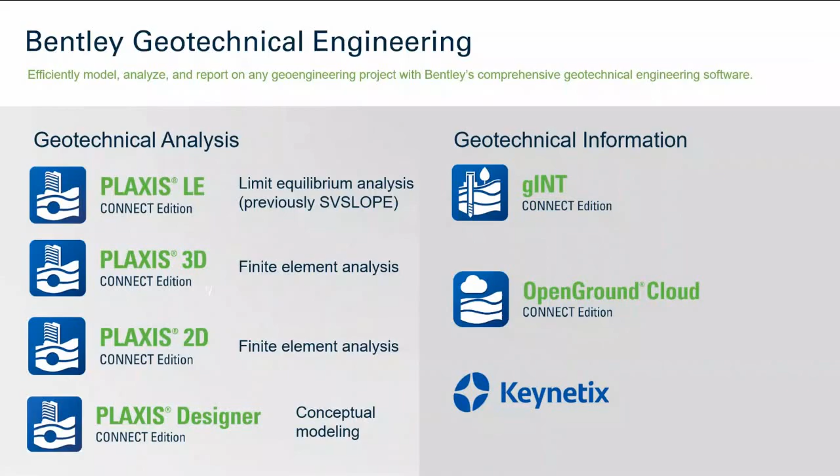So how does PLAXIS LE fit into the Bentley team in terms of geotechnical software? I founded SoilVision back in 1997. That's a long time ago. And we had a product called SVSlope. When we entered Bentley in 2018, SVSlope got renamed and rebranded to PLAXIS LE, and SVDesigner got rebranded as PLAXIS Designer. So we're really going to talk about two products today out of the suite, PLAXIS LE and PLAXIS Designer. There's a whole suite of Bentley products that you can have access to, and we're going to talk a little bit about the interoperability between the packages.

So what is PLAXIS LE? At a high level, PLAXIS LE is a 2D and 3D limit equilibrium package for performing deterministic and probabilistic analysis of the stability of soil or rock slopes. You can calculate the factor of safety and the probability of unsatisfactory performance of slopes, and the software is designed to be very easy to use, as well as have advanced features that can model complex geometries and couple with groundwater seepage. There's comprehensive support for reinforced slopes and external loadings as well.

So it should be noted that the package tries to combine some of the classic features of the method of slices analysis, as well as implementing new probabilistic analysis and advanced searching algorithms. The software was developed by a great team of people that I had to hunt all over the world for in terms of limit equilibrium expertise, and it combines a sleek and simple user interface with advanced presentation of the results. So this presentation will focus on 2D.

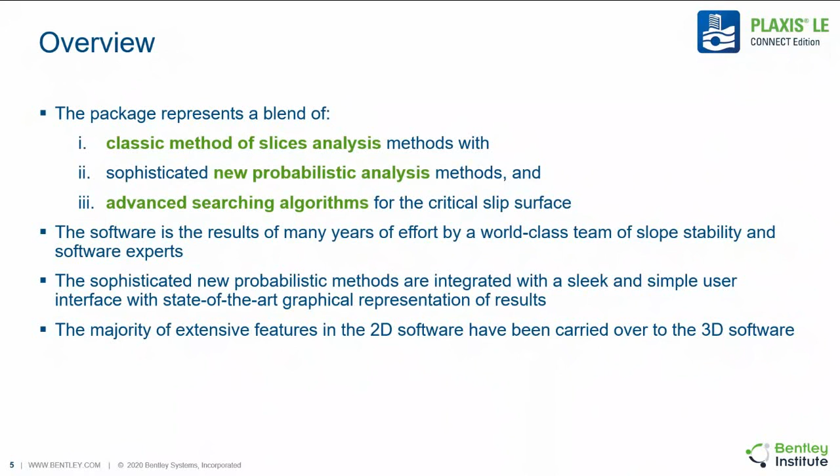However, it should be noted that the majority of the features mentioned in the software have been moved over to a full 3D analysis. So in terms of workflow, the software works from left to right through the main menu system. So in other words, if the user progresses through the menu options in a left to right fashion, you will ultimately be guided through creating and solving an analysis.

For boundary value problems, the primary focus is on three aspects of the model, which includes geometry, materials, and boundary conditions. So in a limit equilibrium, the boundary conditions could be line loads or distributed loads or seismic loads. And slope stabilization can effectively act as internal boundary conditions.

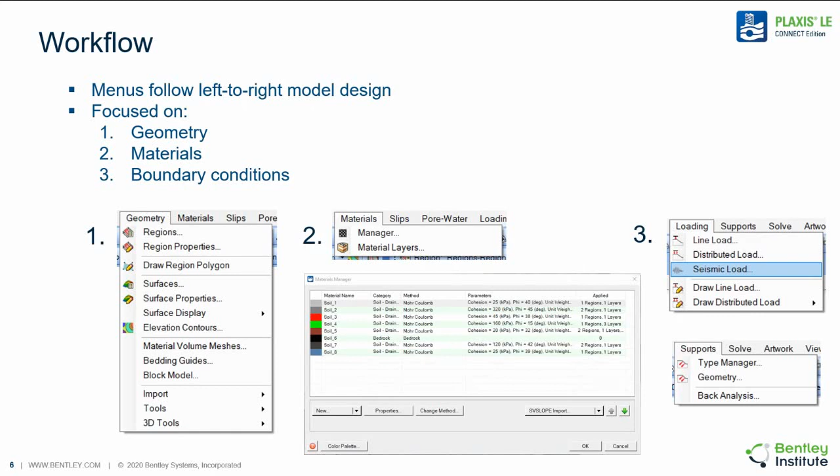So in terms of creating a new model and creating the geometry, a new model can be accomplished by importing objects or by drawing geometry polygons using CAD-like features in the software. The line angle and slope and length is displayed during the drawing process. And grid and object snapping aids allow assurance that the objects join properly.

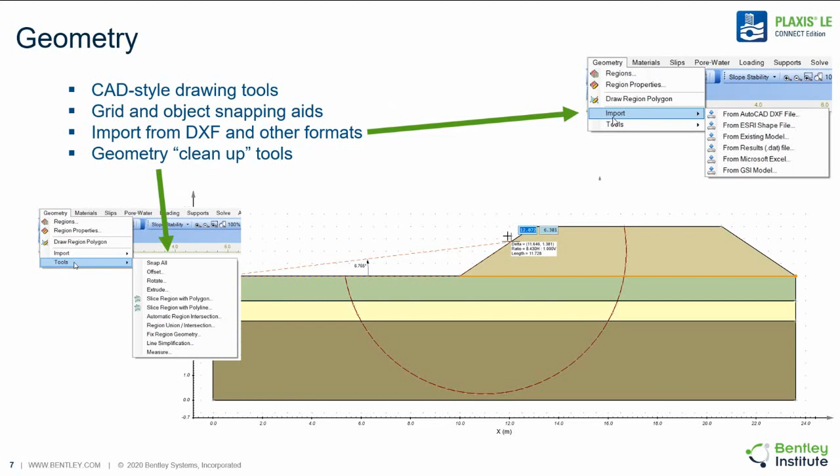So there's also a number of geometry cleanup tools. If you have drawn geometry maybe in a wrong way, or you brought it in from AutoCAD, you can correct it and fix the drawing so that everything exactly joins together and there's no gaps or no overlaps in the model.

So there's a comprehensive list of constitutive models that guide the behavior of soil or rock within the model domain. There's almost 30 different constitutive models that are implemented in the slope stability software. There's also methods for estimating unsaturated seepage properties in the groundwater modeling module. So an associated SoilVision Soils database has over 40,000 soils, allowing for a number of unsaturated soil properties to be selected based on data mining.

So soil water characteristic curves can be easily generated for a wide variety of soils for the basis of unsaturated seepage modeling in the software. And that unsaturated seepage can be used to generate pore water pressures, which can then feed into your slope stability software.

The software has a comprehensive array of searching methods for finding that critical slip surface. And the searching methods comprise both circular and non-circular methods, as well as optimization. So optimization further refines any particular circular or non-circular searching method to find the lowest factor of safety.

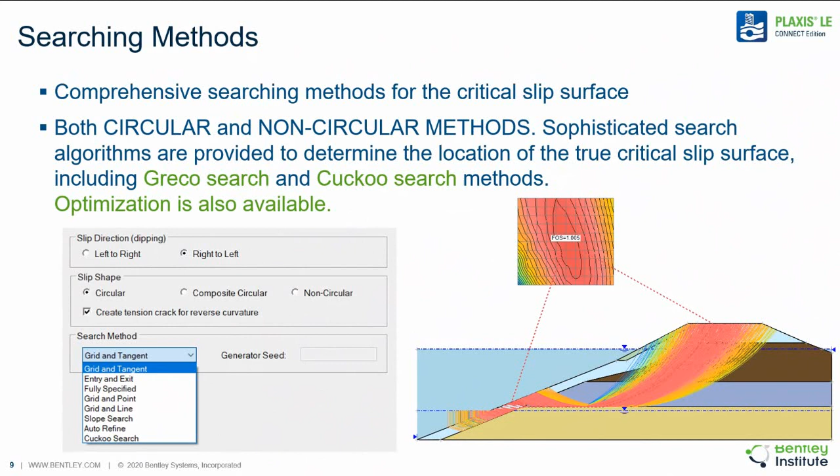So there's a number of different ways to put pore water pressures into a slope stability analysis. Water tables can be used and drawn in the software. You can likewise draw piezometric surfaces, use Ru values, or put in discrete measurement points, which are then interpolated between to have a continuous field of pore water pressures.

And this is important because we know that pore water pressures are the most common contributing factor to a slope failure. You have a change in pore water pressures that affects the stability of the slope, and then there's a subsequent slope stability issue. There's also methods of handling unsaturated suctions in slopes.

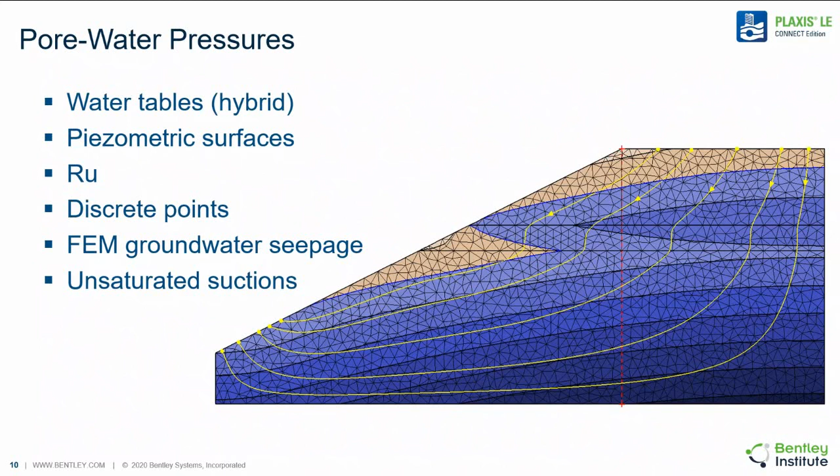So in terms of loadings, there are various types of loadings that can be accommodated in the software, including distributed loads, point loads, and seismic loads. And these loads may be drawn graphically and are easily added to the boundaries of the model.

It's common in the industry to use a pseudostatic method for seismic analysis considerations in a slope. And the pseudostatic method is very common. It has a number of advantages in that it's very simple and direct. It's simple to implement in the context of a limit equilibrium analysis.

However, there's certain drawbacks to this method in that it tends to give you an unrealistic slip shape that is very deep. It applies an equal force that's the same with any depth, which is not that physically realistic. In reality, the accelerations due to a seismic event decay as you go down in the ground.

It's been criticized as not necessarily being closely aligned with reality, but it is a simple method to use. There's also a lack of consensus in terms of what coefficients to put into this type of analysis, so there's a lack of consensus on how valuable this method is in the industry.

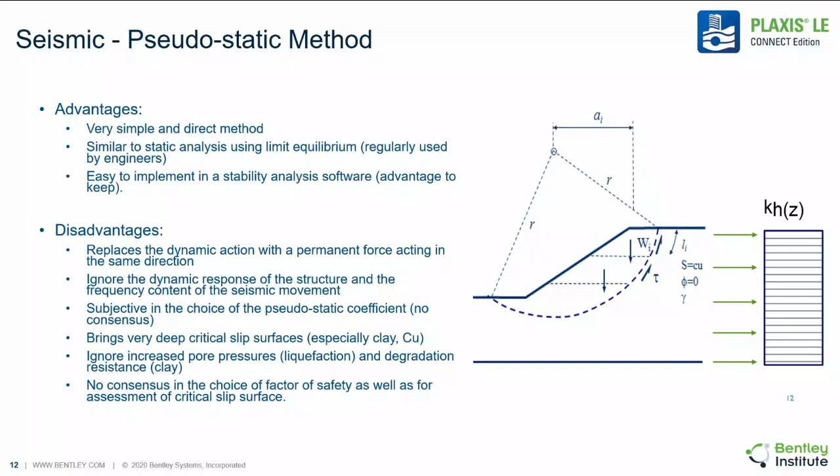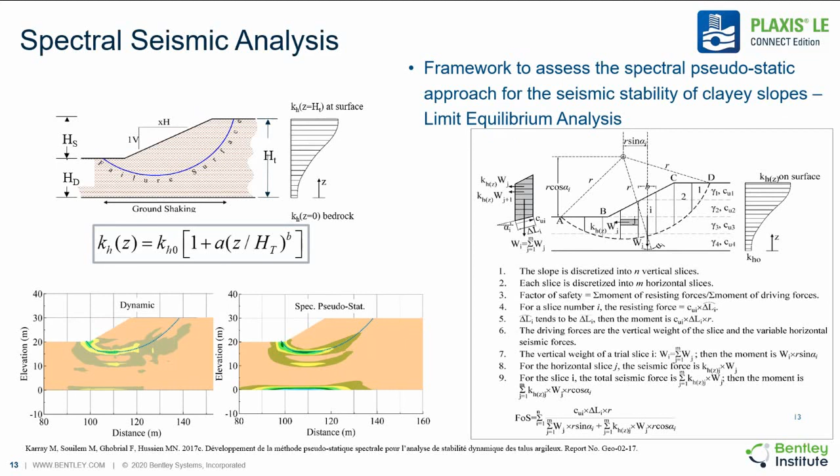As a result, PLAXIS, SoilVision, and subsequently the PLAXIS LE team collaborated with a university in Canada to implement a more comprehensive method called spectral seismic analysis. This method allows a decaying function as the key element of force application with depth, and has been shown to be much more realistic in aligning the factor of safety to a fully dynamic finite difference or finite element analysis. As can be seen in the pictures in the lower left, use of this function greatly helps the accuracy of the analysis, and we were happy to do this as a collaboration with the university in Canada.

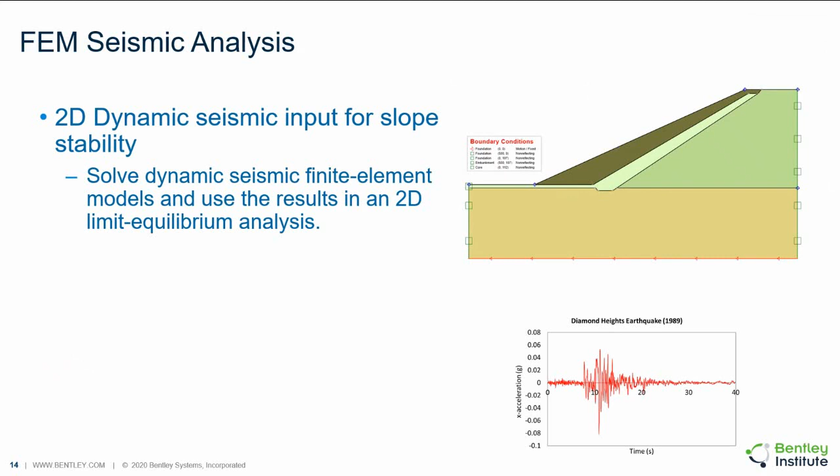There's also a finite element seismic analysis module that can be utilized for solving dynamic scenarios, and this can be used in conjunction with the limit equilibrium software.

There are also many support methods that can be implemented in the software, such as grouted tiebacks, end anchors, soil nails, micropiles, and geotextiles.

So what are some of the differentiating features? The software has been able to differentiate itself against known software competitors in the market. Let's talk about some of these features here.

The software was positioned to be a comprehensive slope stability analysis package, and therefore offers a number of advanced differentiating features, which include simplified 3D model creation using PLAXIS Designer. Even if the end result is still a 2D analysis, the package allows comprehensive spatial analysis of a 3D site.

The software also implements advanced unsaturated flow and the ability to model climate boundary conditions in detail, such that you can consider actual evaporation in your analysis. The software also allows calculation of rapid drawdown scenarios.

Advanced probabilistic analysis is built into the software, as well as advanced spatial variability calculations. There are advanced searching methods using dynamic programming, and the software's ability to model the stability of rock slopes has been greatly enhanced through the use of bedding planes and advanced anisotropic

soil strength models. The software also integrates with PLAXIS FEM and is useful for sharing models between finite element and limit equilibrium.

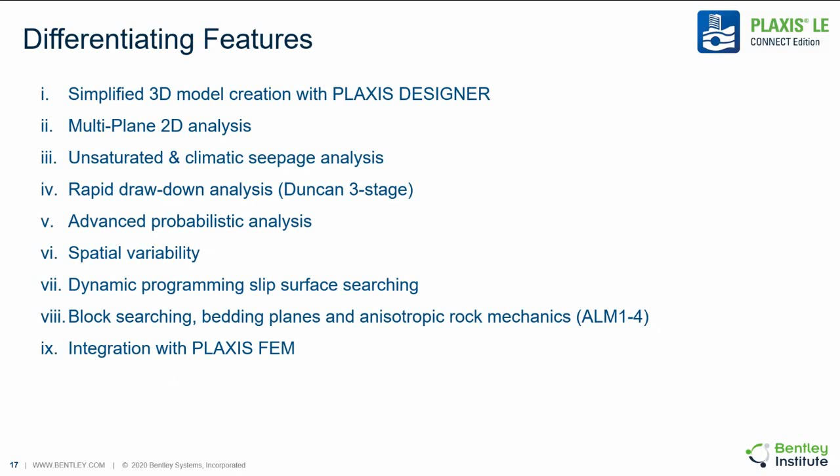Just to talk a little bit about PLAXIS Designer, it's a three-dimensional geotech conceptual modeling software that enables 3D compilation and visualization of geotech information to improve design. It allows conceptualization of many different data sources to give a comprehensive 3D site view of existing conditions or future designs. We've used it a number of times for different projects in-house as well.

It allows fast 2D spatial stability modeling, which greatly reduces modeling times. Instead of analyzing and agonizing over which slice you want to analyze in 2D, you can now sweep your slices around a 3D model and analyze tens or hundreds of them, getting an idea of how the spatial stability varies depending on what slice you take in your 3D site.

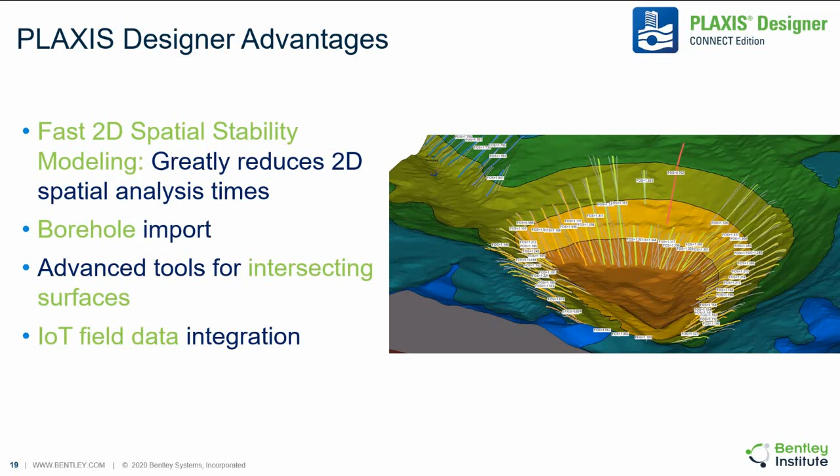Just as an example, here's a tailings dam, and we're applying multiplane analysis across this earth structure on the upstream and downstream sides. Traditionally in this structure, you'd take maybe one, two, three, or four different sections at different places. In multiplane analysis, you can take hundreds of sections up and down a slope, and every section is a full 2D analysis, giving you a much better idea of how the factor of safety can change depending on where you're analyzing in your structure.

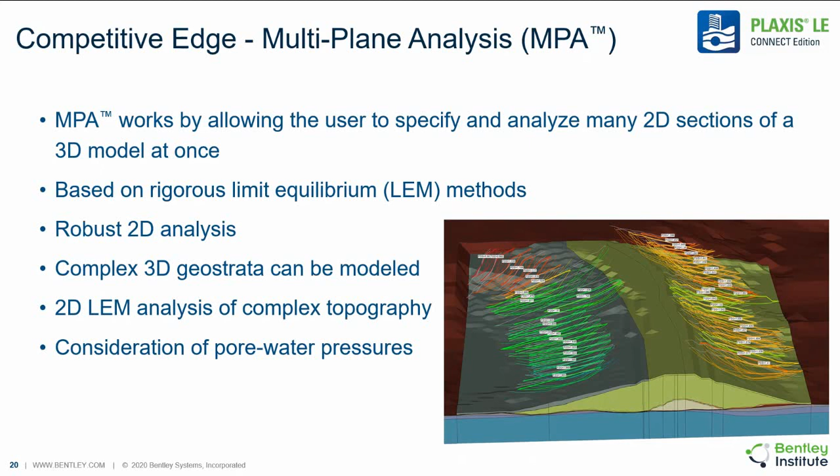This gives you a very comprehensive way to sweep your analysis and gives you more data at your fingertips as a designing engineer to make educated decisions about your true minimum factor of safety. You can also consider pore water pressures, and complex topographies or internal geostrata can be considered in this paradigm.

Unsaturated climatic analysis is possible with built-in finite element seepage modeling in the software, and you can implement unsaturated constitutive models to allow consideration of unsaturated conditions such as rainfall events and how those affect the slope stability of a slope. This makes use of the Wilson-Penman method to calculate actual evaporation from a soil surface.

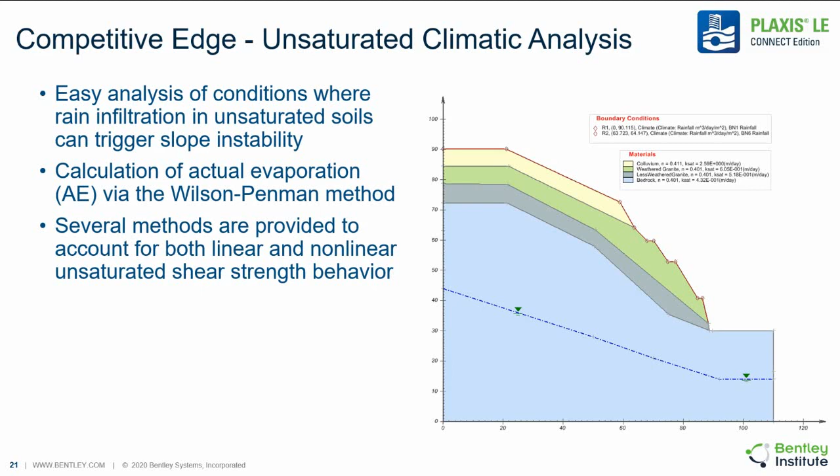Those methods are coupled between the seepage analysis and the climatic boundary condition, and then how that impacts the unsaturated shear strength of a particular typical scenario.

Rapid drawdown is also implemented in the software. It can identify pore water pressures that may build up behind a slope and cause slope instability. The software allows analysis of rapid drawdown conditions both in a total stress or effective stress manner, and the effective stress manner allows coupling with finite element seepage analysis.

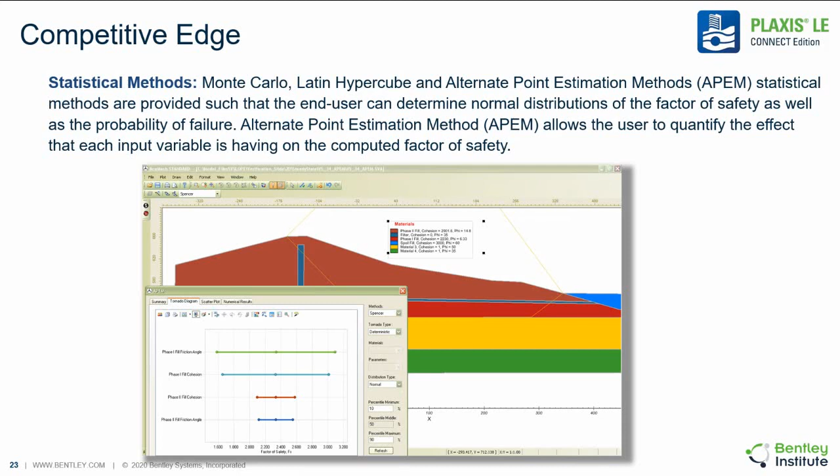There's advanced probabilistic analysis, including Monte Carlo, Latin hypercube, and the alternate point estimate method. The alternate point estimate method allows generation of a tornado diagram, which identifies the relative impact of each input variable on the ultimate factor of safety. The variables at the top have the most ability to sway the factor of safety, so you can determine the relative impact of various model inputs.

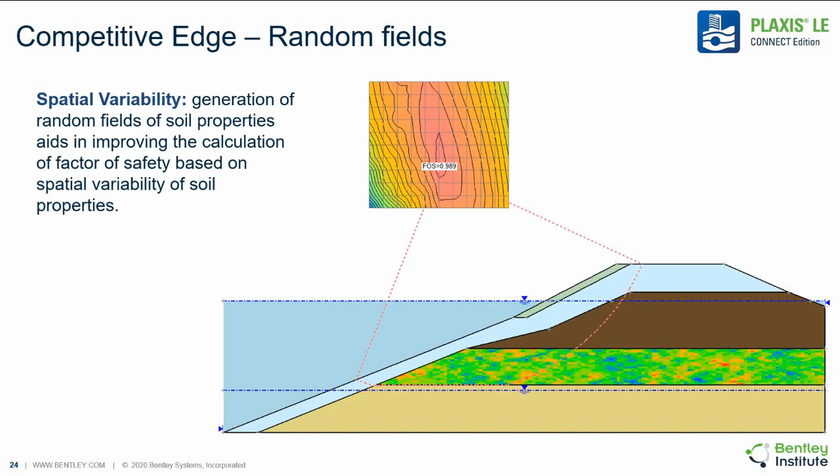Spatial variability can be considered in greater detail in the software through the use of random fields. In this methodology, soil properties can be varied across the region domain in a random fashion, such that the influence can be properly quantified. You can integrate this with probabilistic analysis such that a different random field is generated for every iteration of a Monte Carlo analysis, for example, and you can do very advanced probabilistic analysis.

Dynamic programming is another method that was developed, and my father worked on this a number of years ago, based on research done both in Japan and in Israel. This is an interesting new method that uses the traveling salesman algorithm to try to hunt for a minimum slip surface through a stress field, so your slip surface does not have to be circular—it can be non-circular—and it's proven to be a very powerful method in finding your critical slip surface.

There's also advanced block searching features that have been implemented where we can reference a number of different shapes in the software, such as points, lines, or grids, and those can be hinge points to find your most critical slip surface.

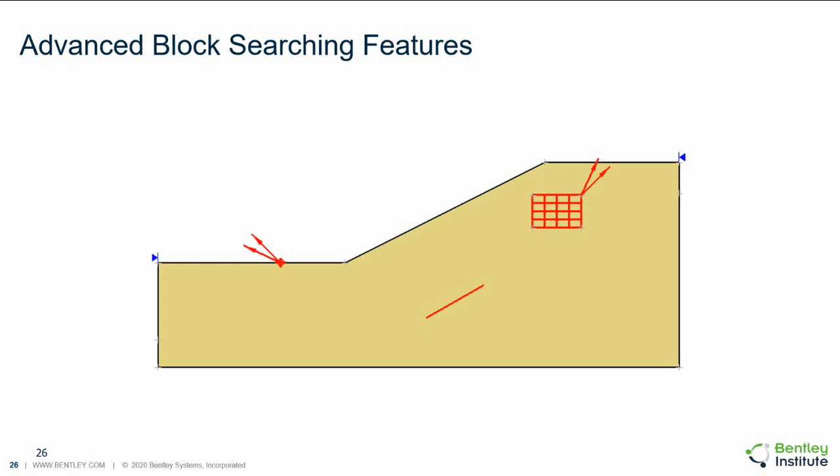There's also a number of features in the software to handle rock mechanics and associated features such as weak surfaces, anisotropy, bedding guides, and weak surfaces can be interpolated between the bedding guides.

Complementary to this, there's a number of constitutive models that can support rock mechanics types of implementations. Those include anisotropic linear models and Barton Bandis, Hoek-Brown, common strength rock strength models.

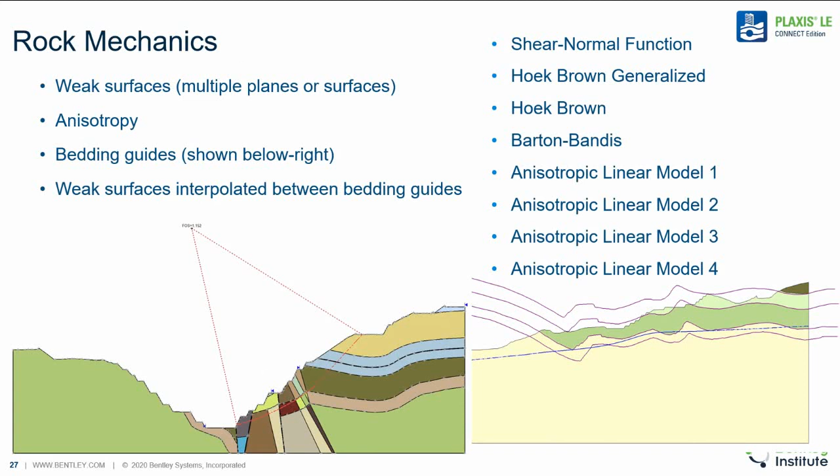There's also PLAXIS LE integration with the PLAXIS Finite-Element software, and you can transfer limit equilibrium models to the PLAXIS 2D software and reanalyze them using the shear strength reduction method to get a comparison for how that compares next to your limit equilibrium analysis.

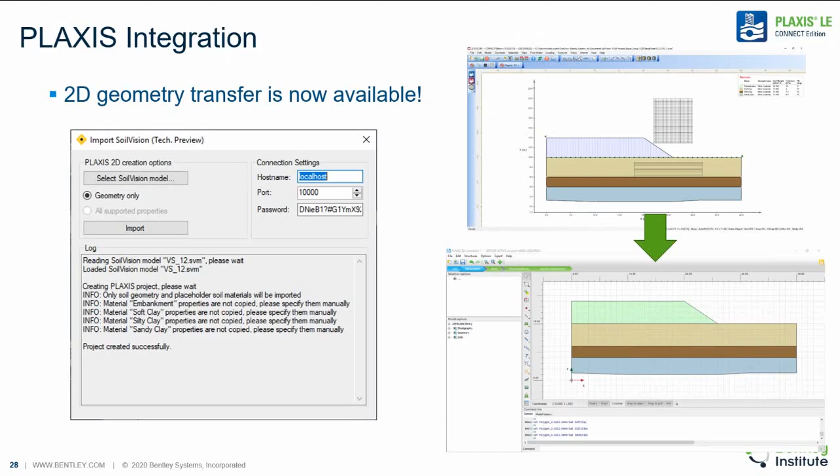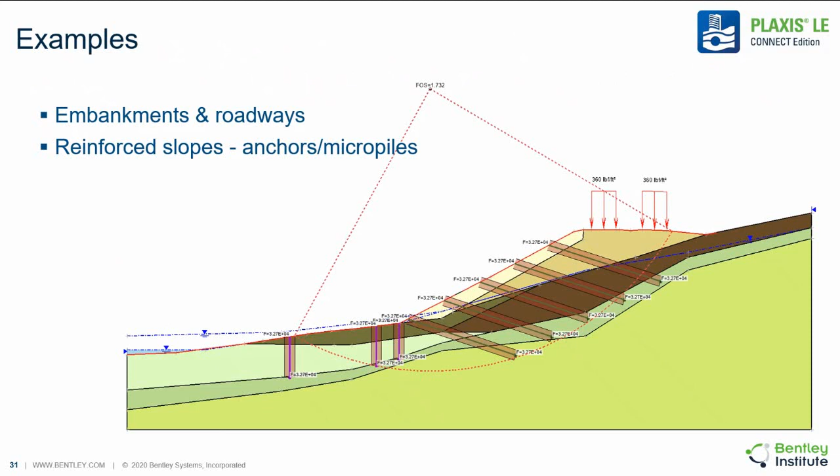Typical applications we go through include earth dams and levees, which can be used to find a factor of safety in various design scenarios or in rapid drawdown. You can look at embankments and roadways that are either reinforced or unreinforced. In this case, we have a road structure placed on a slope with fill, and then to further strengthen the slope, there's reinforcements put in the form of anchors or micropiles.

This also just shows an example of using random fields and varying a certain layer's material properties, in this case the friction angle of that layer, to see the impact on the factor of safety. And then you have the resulting non-circular slip surface that is estimated for this scenario.

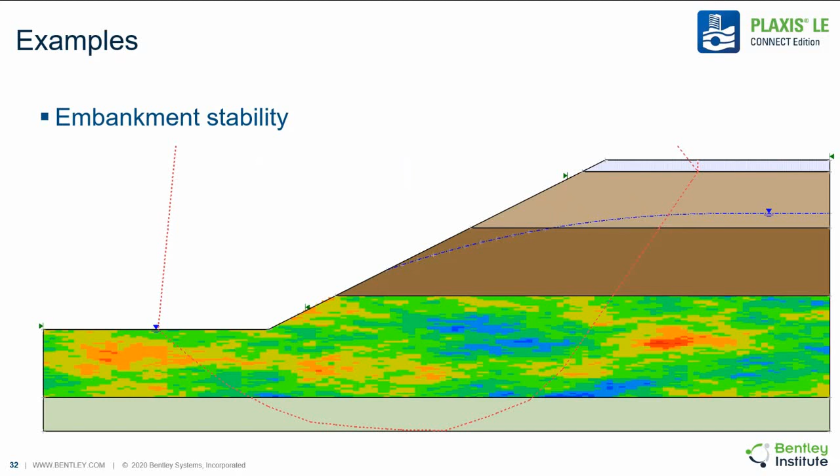So overall, the benefits of the PLAXIS LE 2D software can be summarized as follows. The software allows comprehensive building and conceptualization of 3D site data using PLAXIS Designer. There's also access to advanced statistical methods to quantify variability, and comprehensive searching methods to give improved chances of finding the true minimum critical slip surface. There's comprehensive analysis of unsaturated slopes, integrated finite element seismic and groundwater analysis, as well as the ability to export models to the PLAXIS finite element software. Thus it's a very comprehensive tool for slope stability analysis.

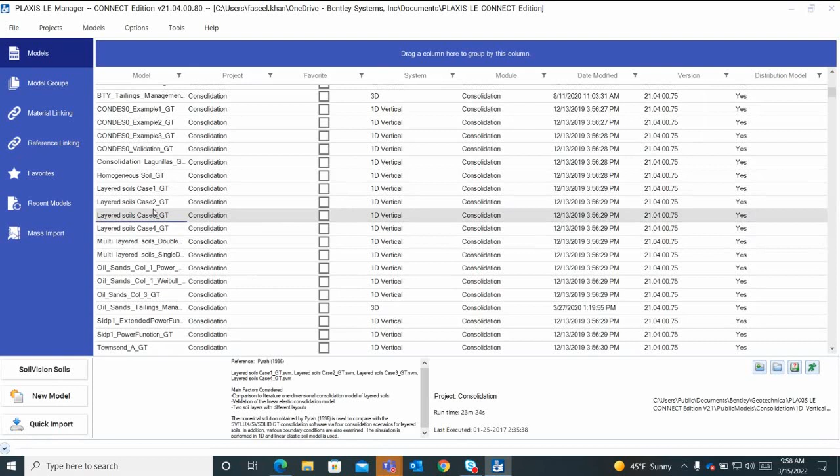So here, these are all the distribution models and all the models you have saved yourself will be shown in this manager. When you download PLAXIS LE, you are provided with all these models, some are benchmark models, some are actual projects. These are arranged in 2D, 3D, or 1D format, or you can also arrange them by slope stability, PLAXIS Designer, groundwater, dynamics.

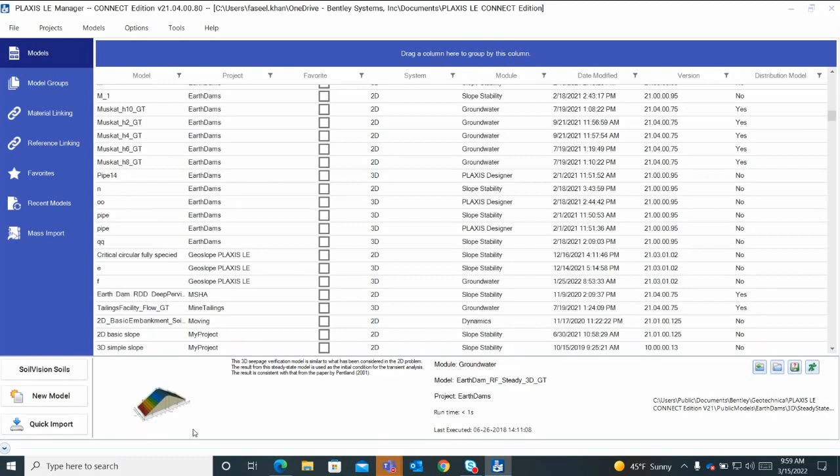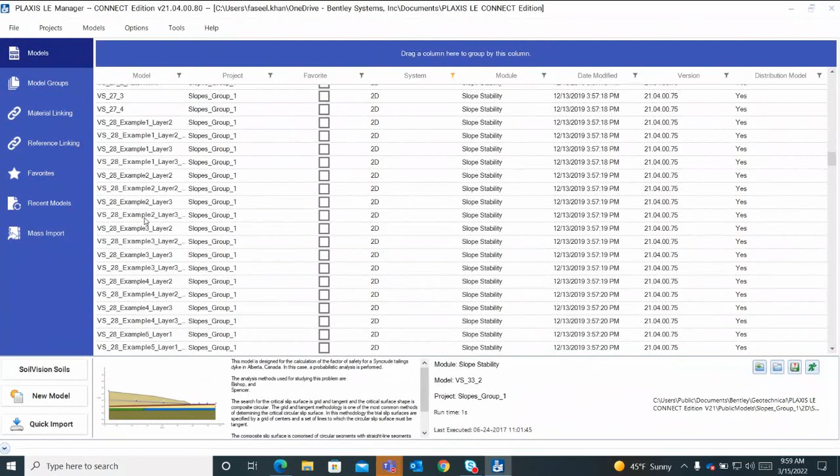At the bottom, you will see the preview of the model you select. Let me filter out the 2D models, so now it's only showing all the 2D distribution models. I will select a model right from here.

Now, because this is a distribution model, we cannot make changes in it, so we have to save it into our own folder. I'm going to save it here as slope excavation.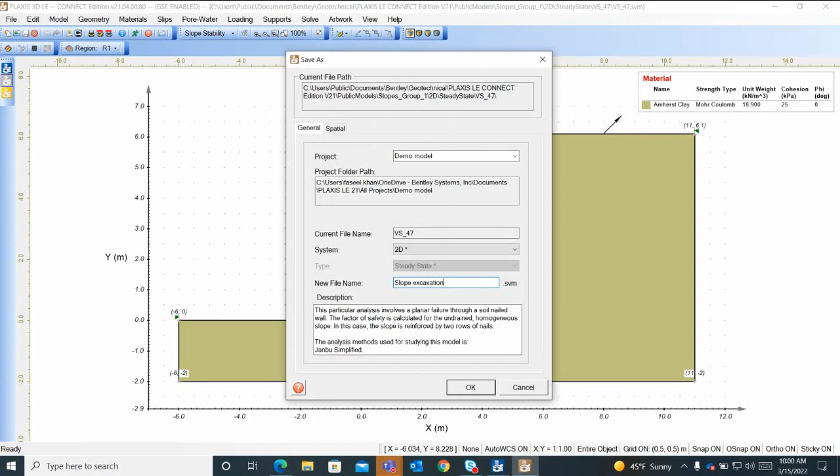Now you see that if you go to the top, you will see this menu bar option as Model, and we start by going into the Settings.

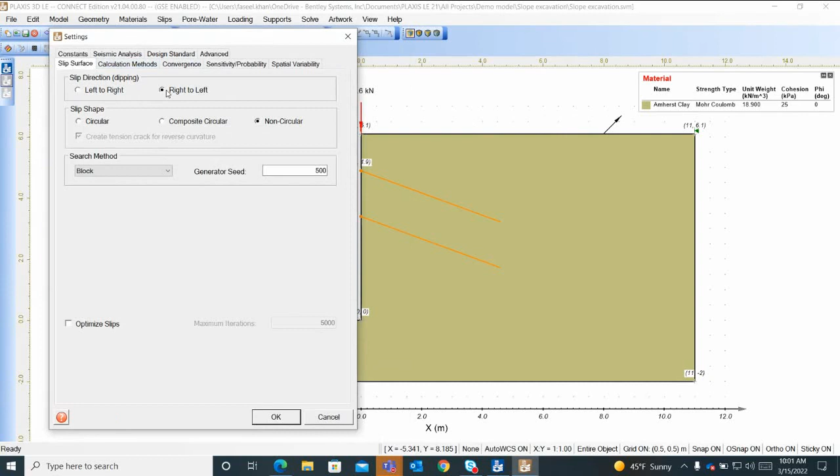Here we can select the slip surface to be from left to right or from right to left. In this case, our slip direction is going to be from right to left. We can define the shape as circular, composite, or non-circular, so here we're going to define non-circular. The search method can be specified as fully specified, cuckoo search, or others. Right now we are selecting the block search method.

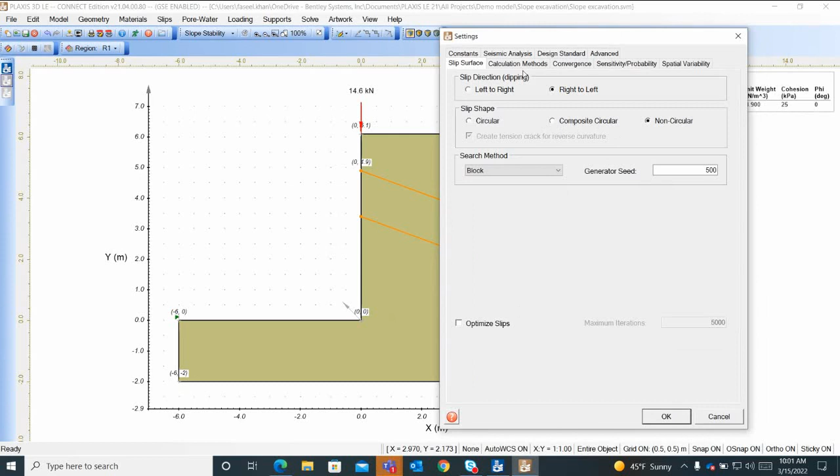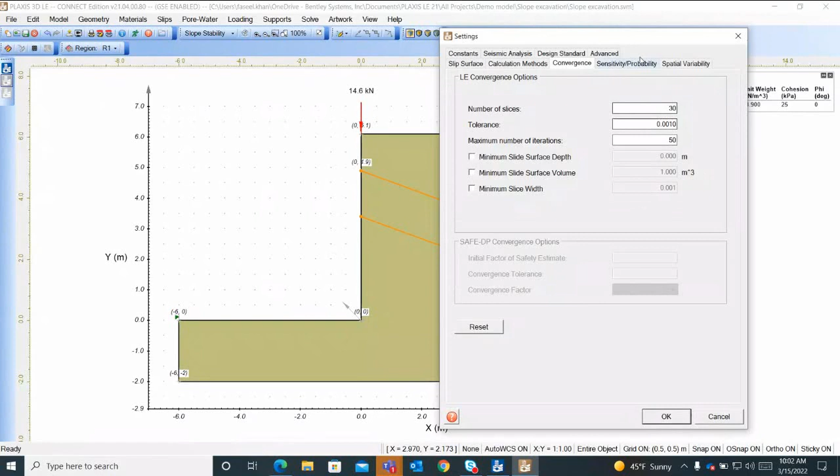We can also use optimization for the slip surfaces in case your slip surface is not going to be circular. For calculation methods for the limit equilibrium, we can use Bishop, Janbu, Fredlund, and for convergence we have these settings to display number of slices and tolerance values, which we can adjust.

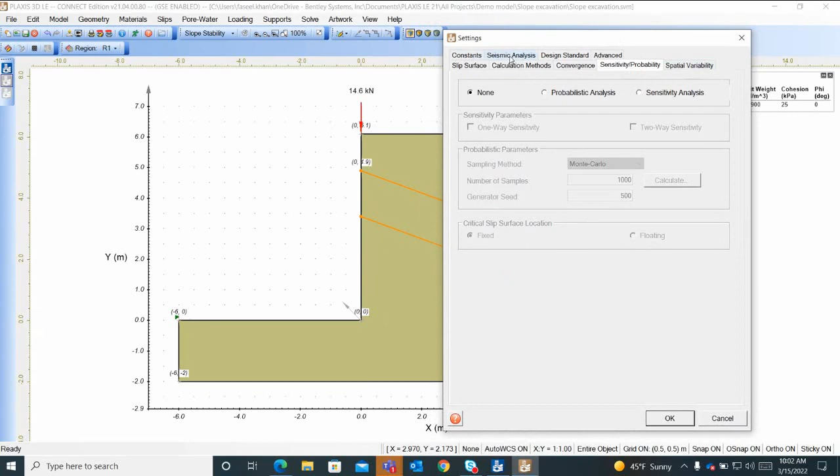If we want to do a probability analysis or a sensitivity analysis, we can do that by clicking here. Similarly, for a seismic analysis, we can enable it from here as well.

We also have these design standards built into the program - 4 Eurocode design approaches and 1 British standard - and you can input your own factors here. If you are applying some load factors, you can do that from here as well.

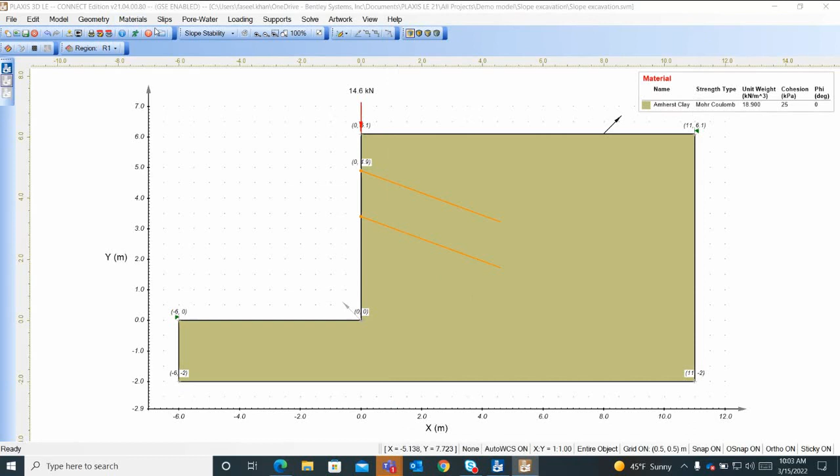We press OK, so next is the materials. Right now, if we go to the material manager, you can see that there is one material assigned here, Amherst clay. Also in the GUI, you can see it's displayed in a box here with its properties displayed.

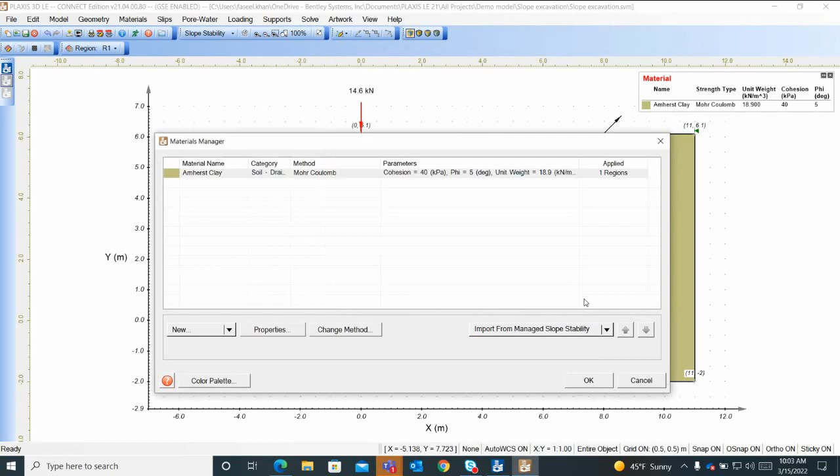If I double click on it, I will open it and can edit its properties to whatever I want. I'm going to use these, and I'm also going to create a new soil layer, say it's sandy silt. From this dropdown, I can select various material properties that I can assign.

I can assign unsaturated properties. You can have bedrock, you can even have no strength water, Hoek-Brown materials for rocks. You can have Mohr-Coulomb, linear elastic, bilinear, or even power curve functions, as well as shear normal function, which you can define for your material strength.

So let's go here and select a color and use the Mohr-Coulomb model for a new material. Just assign a random cohesion and friction angle and unit weight. Press OK.

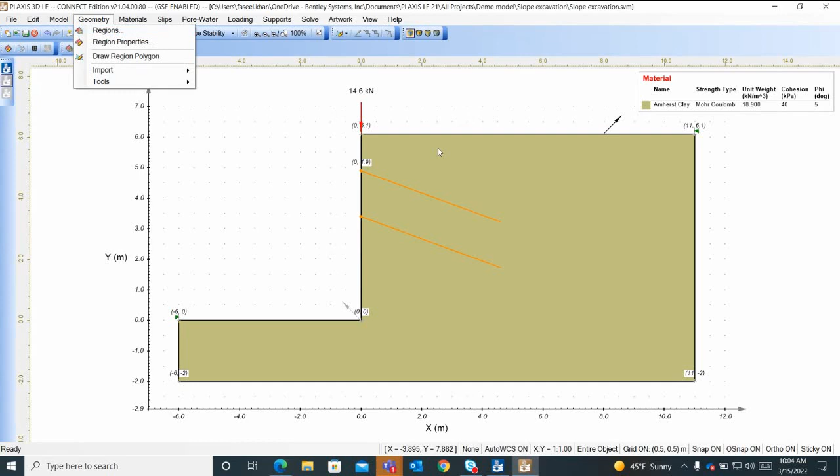Once we define the materials, we can go ahead and also create regions. If you go to Geometry and Regions, right now if we click here, we see that we have only one region assigned or created in this model. So if we go to Geometry and Regions, we'll see we have just one.

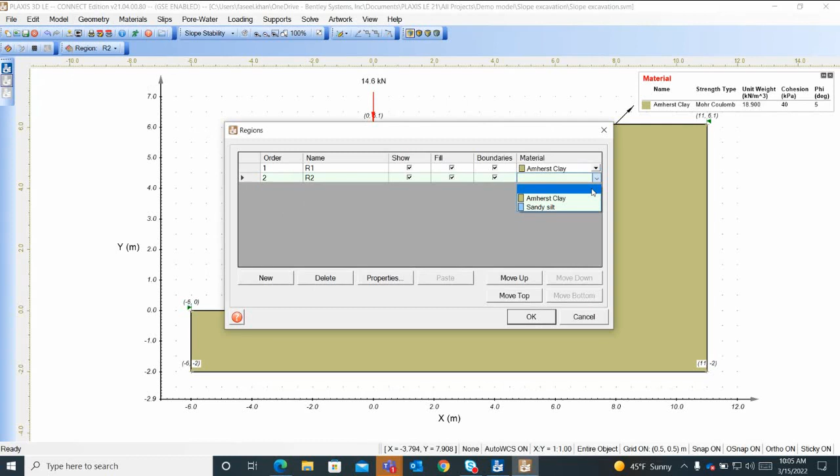So we can create a new one and we can assign the material from here, or we can first create the region by going to Geometry and clicking on Draw Region Polygon. Say we have a layer here, we will just draw this layer right here.

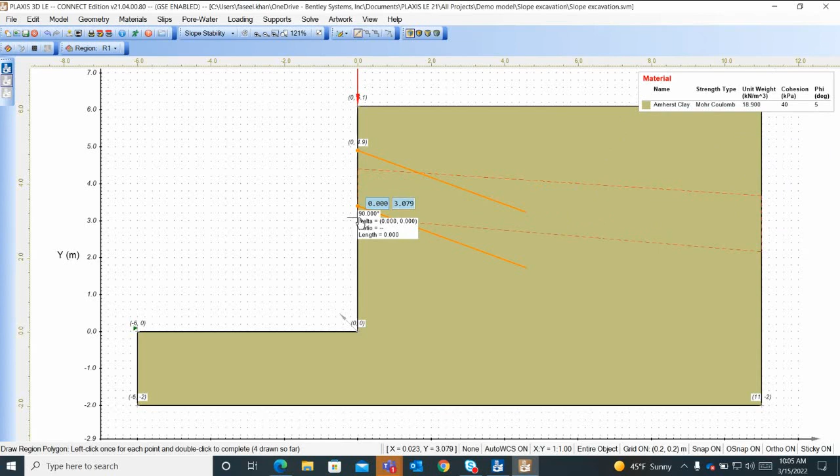Or maybe we have something on the top as well. So we go here, geometry, draw region polygon. Say we have a small layer over here, like a small load over here. And so if we want to assign the materials, we can just right click the region, apply material, and we can assign the materials right from there. So you can have as many layers as you want.

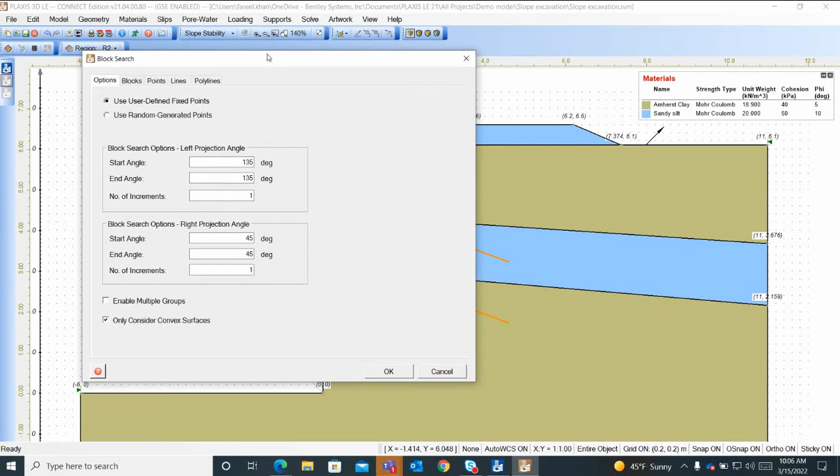So the next step is to define your slips, which we defined initially in the model settings to be block search. So if we go here, we can click on block search here. So we have different options here for this search method. You can use your own fixed points, or you can use random generated points. You have to define your left and right projection angles, the exit angles for the slip. So here we have defined it as point and lines. See here, the line is highlighted.

So if you want to know more about any of the features in the program, you can just go to help, PLAXIS user manual. And here you can type, I want to know more about the block search. So I will type block search here and double click here. So it will bring up information about this method.

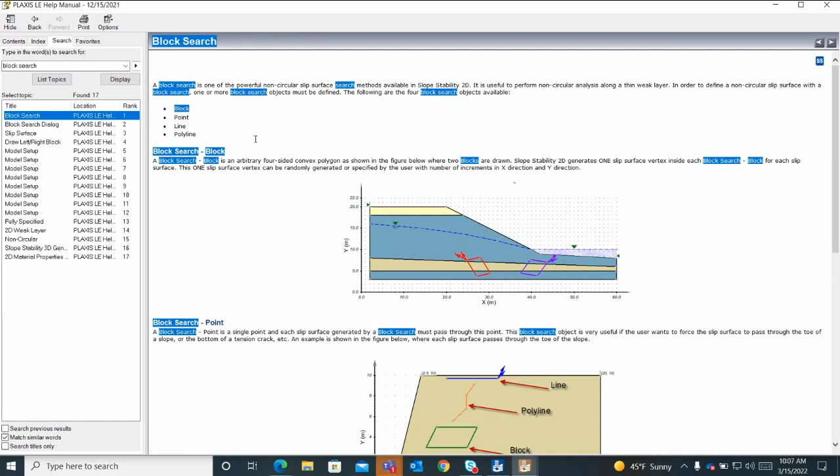So here you can see you can specify the block search as a point in which the slips are forced to exit to this point, or you can have a block or a line or a polyline. And these lines can be subdivided into different segments, and all those segments will be considered as slip lines to exit from there.

Also, we can go to pore water settings then, and here we can establish our water table by drawing it, or if we have results from a groundwater analysis, we can import that result file as well, or we can do a result file linking in which you can link your groundwater results with the slope stability analysis, so that if something changes in your groundwater model, the results will be automatically updated in the slope stability model.

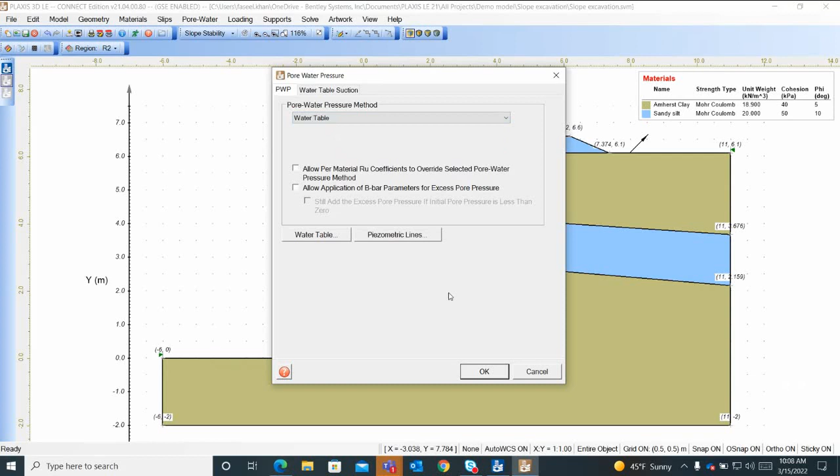So let's say we have a water table, and I'm going to select all regions in which it will apply. So I can assign the coordinates of the water table, or I can just draw it. For simplicity, I'm just drawing it right now. Say it's going like this. It's okay. So we got a water table.

The next tab here is the loading. So if we go to loading, we can add line load, distributed load. So right now we just added a point load here. And the next step is going to the supports. So here you go to the type manager. And here we can see the two soil nails are defined here.

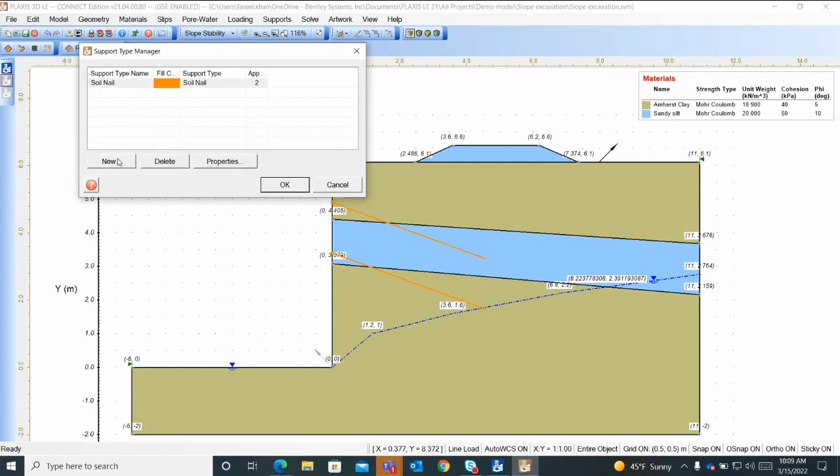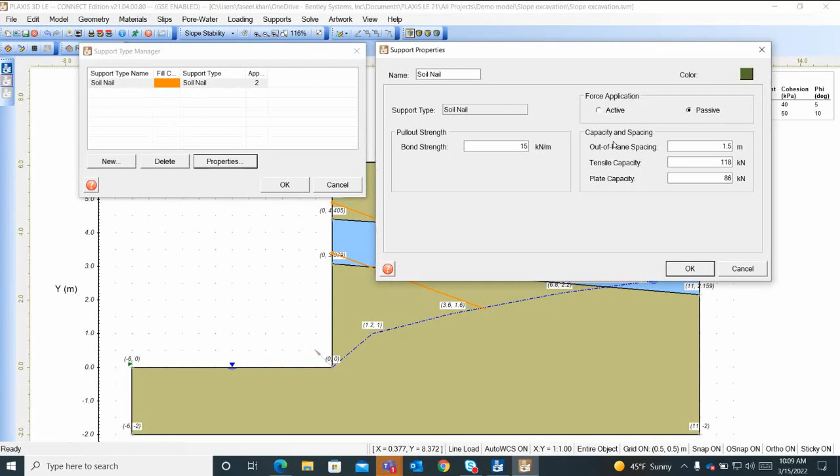And if you go to the properties of the soil nail, you will see that the pull-out strength you can define in kilonewton per meter. You can apply the force application as passive or active, and the capacity and spacing can also be defined here.

And here, if you go to the support geometry, you can define the supports. So here we have support 1, which is being highlighted here. And if you click on support 2, it's highlighted over here. Or you can create a new one. And instead of being individual, you can have multiple supports from the boundary. So right now its orientation is defined normal to the boundary. You can have it horizontal, or say you want it at an angle of -20 degrees.

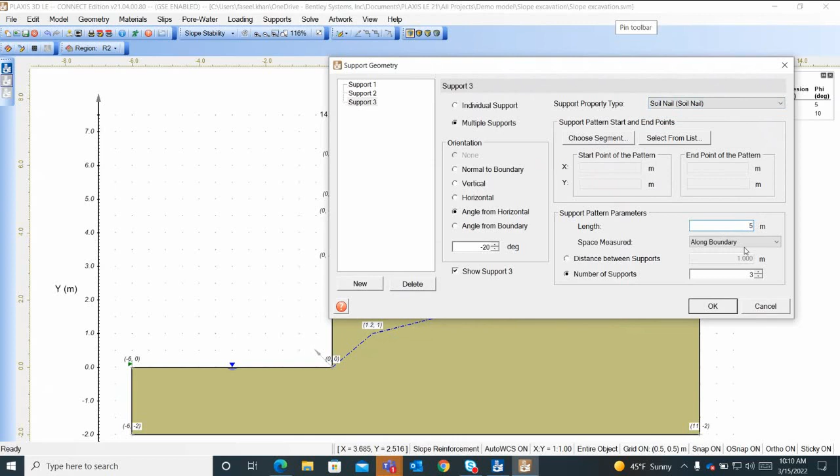And you want it as a soil nail. And then you have to select the segment. Its length, say 5 meters. And number of supports are say 3. So I'm going to choose a segment here. So it will create my supports like that. Okay.

So if you go to the type manager, you can create a new support as well. And these are the options that are available. For example, you can have end anchored, geotextile, grouted tieback, soil nails, micropiles, and even user defined support as well.

So once you have your supports and their proper strengths assigned, your soil layers, your slip circle, you're ready to do the analysis. And you can just go ahead and press analyze, save it.

So it's calculating using the Bishop, Janbu, and GLE methods that we selected. And now we can click on visualize results. We can see that the critical factor of safety using the block search method is 1.6. Here in this window, you will see the slope information for the sliding mass. You will get the weight and the volume of the mass, area, and its entry and exit points over here.

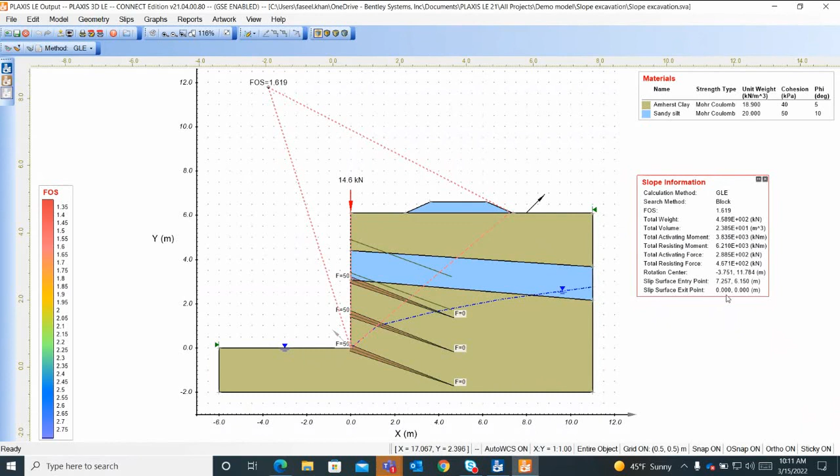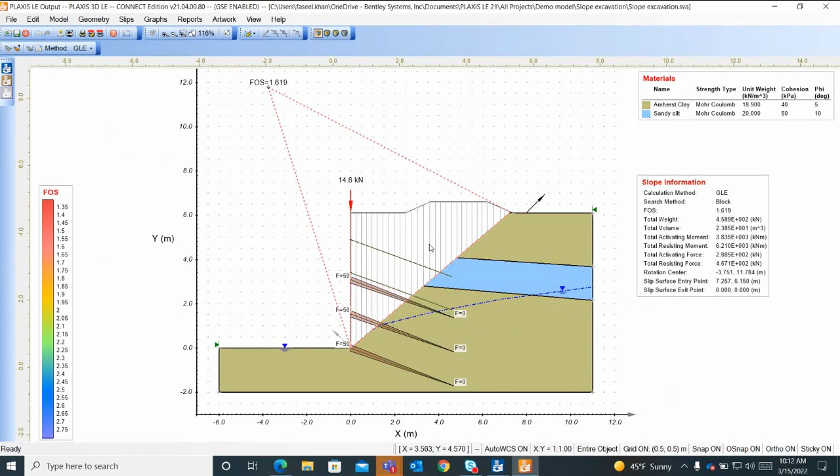Also, if you go up to this menu, you click on slip and you can say show slices. So these are the slices. And if you click on any slice, you can get the information of the forces. And if you double click, you can get more detailed values of that slice. For example, you can get the base friction angle, base cohesion, base normal force, shear stress, left normal force, and everything. And you can then export this diagram as well for your reports.

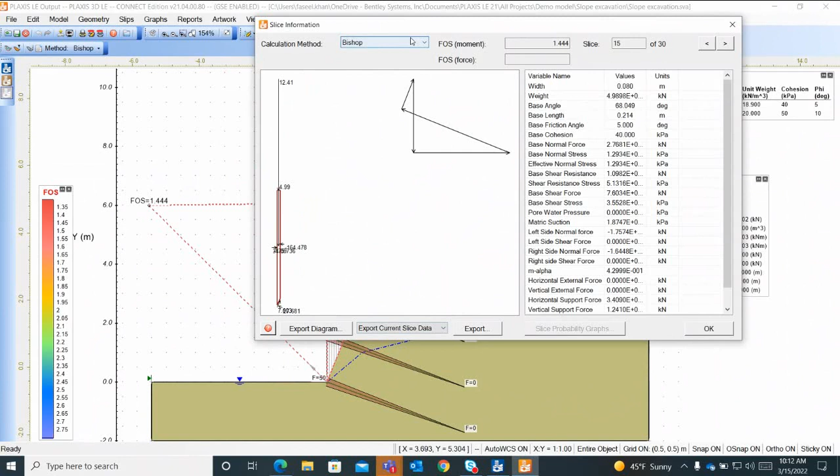And you can also export this data as well for reports. And you can select any of the methods from this drop-down menu as well. So we got our PLAXIS LE model here. Now, for example, I want to do a stress analysis and I want to do it in PLAXIS 2D. So for that, I can open PLAXIS 2D. And we will import this model into PLAXIS 2D for stress analysis.

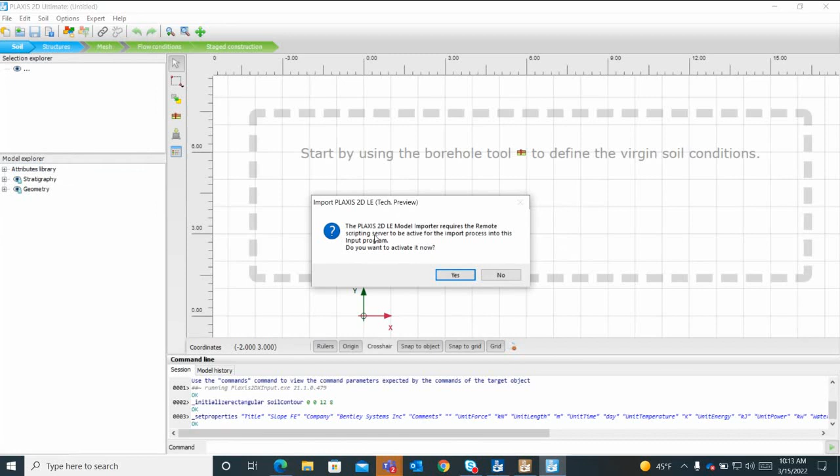So I'm going to create a new project. Slope. Okay. Now here, if I go to the file menu, we can go to import PLAXIS 2D LE. It will ask me to start the remote scripting server. Press yes, start the server. Press close. Now here it's saying select PLAXIS 2D LE model. If I click on it, I can select from any of the distribution models, or I can just browse it. So this is the model that we have, slope excavation. Press OK.

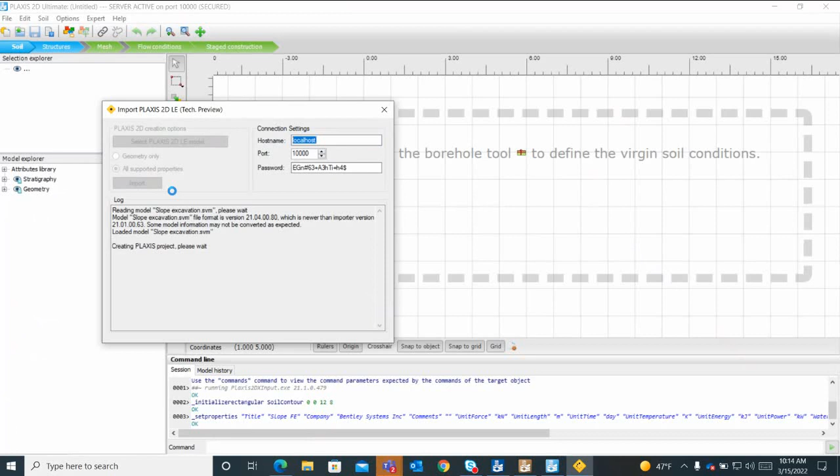So it's converting. It says the model has been loaded, and now it's asking whether I want just the geometry or all supported properties. So I will select all supported properties from here. Press import. So our structure has been imported, as well as the materials. So these are the supports in PLAXIS 2D. If you go here into show materials, you will see that the Amherst Clay and the sandy silt are imported as soils.

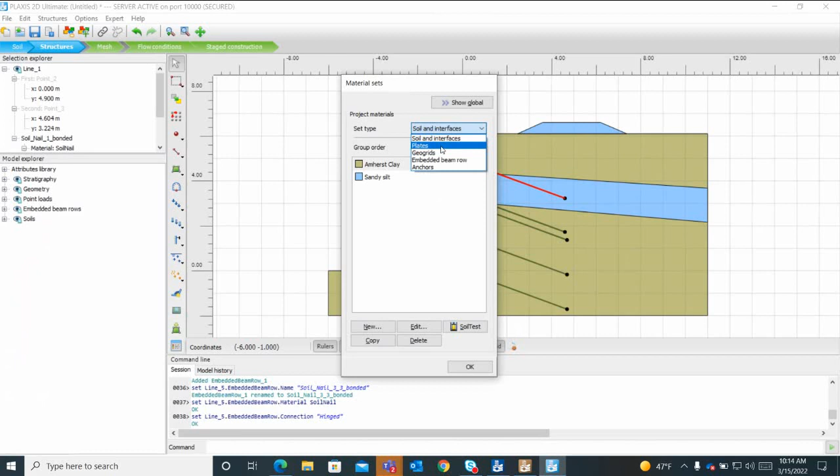And if you click on the type, you can go to embedded beam row. And so your soil nail has been imported as an embedded beam row. And we can then define the properties and do a finite element analysis of this model. We can then go forward and create the mesh, flow conditions, and then in the staged construction, we can add your stages and do the finite element analysis.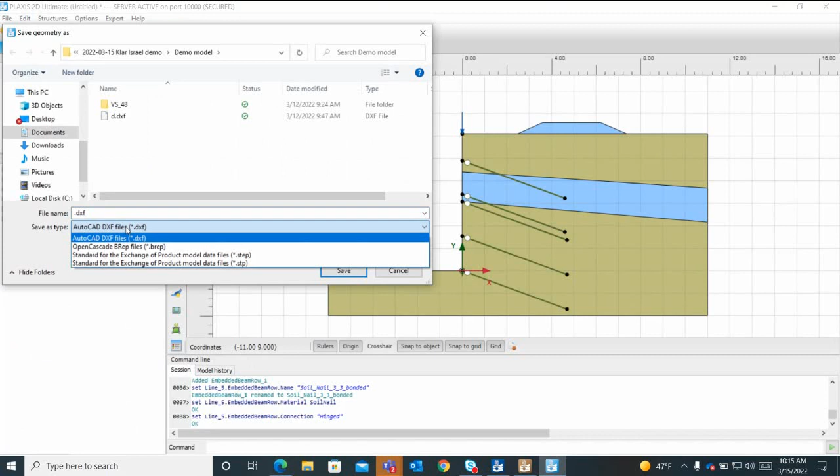If, on the other hand, we want a PLAXIS 2D model to be imported in PLAXIS LE, what we can do is go to the file and export geometry from here. And it will be exported as a DXF file. So in PLAXIS LE, you will import it, or you will import only the structures or the soil polygons, and then you will have to assign those materials to your geometry in PLAXIS LE.

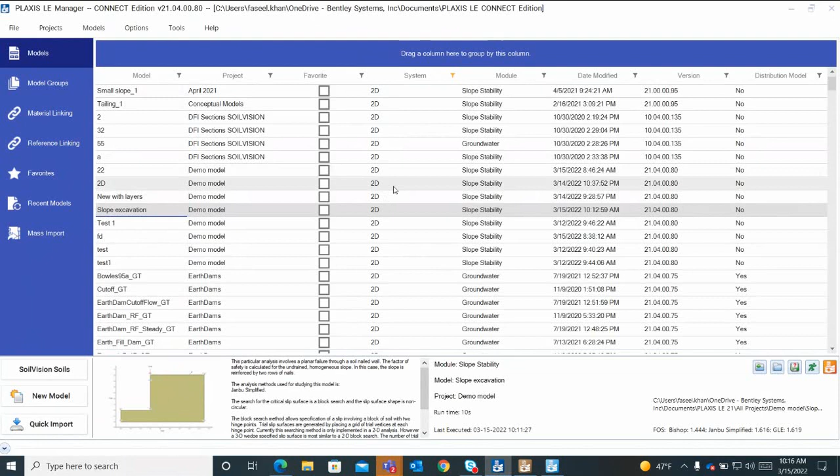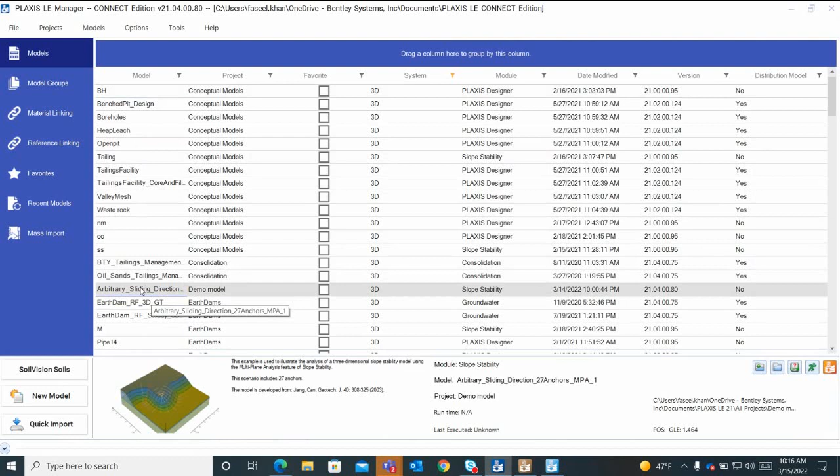The other thing that I wanted to show is the MPA 2D model and how to go from a 3D to a 2D PLAXIS LE model, and from there you can go to a PLAXIS 2D model as well. So for example, here I'm just going to show the 3D models in PLAXIS Manager. And I'm going to select this model here. So this is a 3D model in which the multiplane analysis is being carried out.

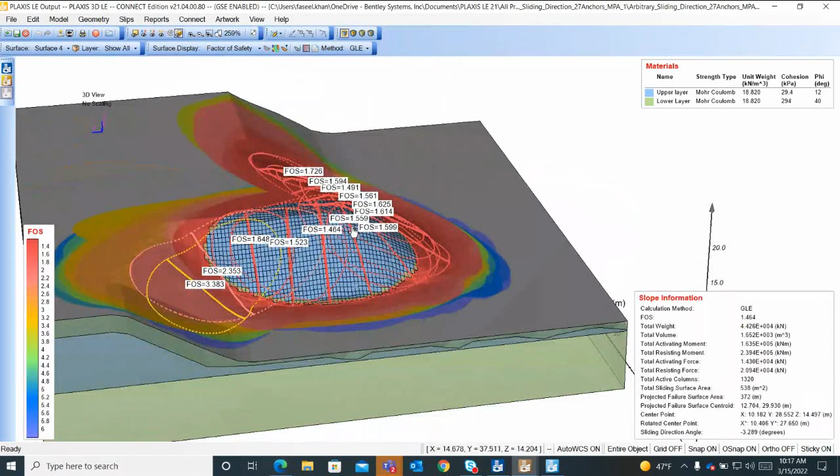You can see that different 2D slip circles are generated, as well as grouted tiebacks are modeled to support the slope. So here, just to quickly go through the output, because creating this model will require a separate webinar.

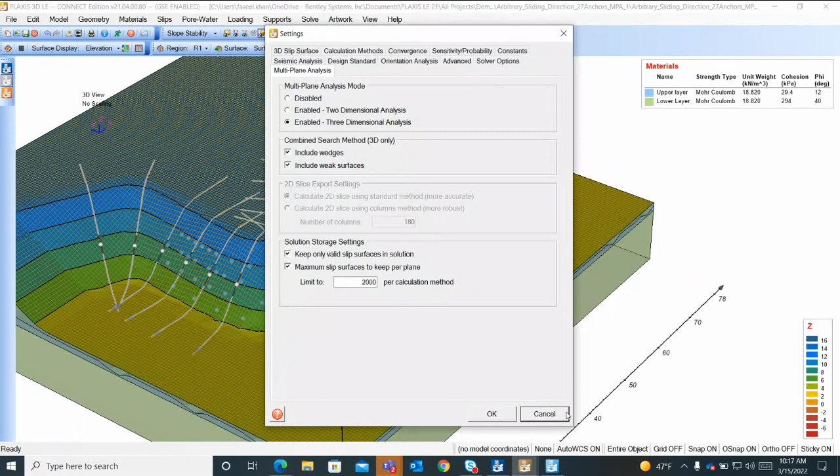But if you go to the input first, you can see that when you are in the 3D model, you can go to the model and you have this option of multiplane analysis. But to get that, you go to model and settings, and here in the multiplane analysis, initially it's disabled, then you enable it from here. And then you can define your multiplanes.

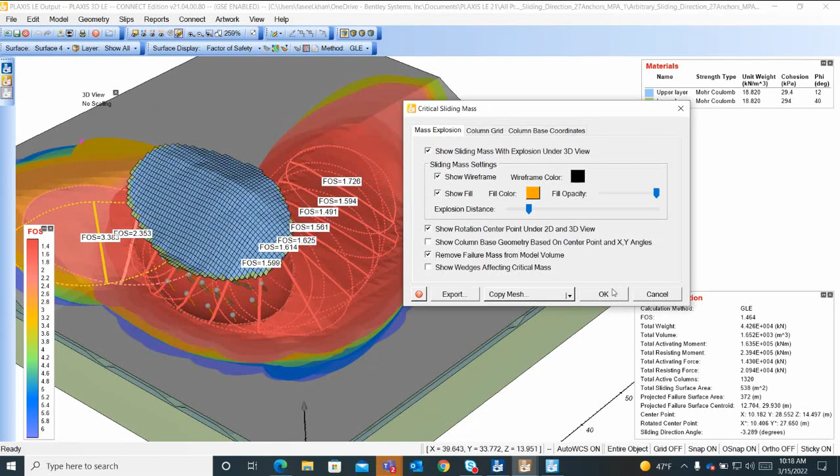So let's quickly go to the output, and here we can see we have our combined critical sliding mass. So if we go to the slips and critical sliding mass, we can actually explode this mass right here. So this is our critical sliding mass, and this information gives us the areas and volumes and weight of this mass, as well as the resisting forces.

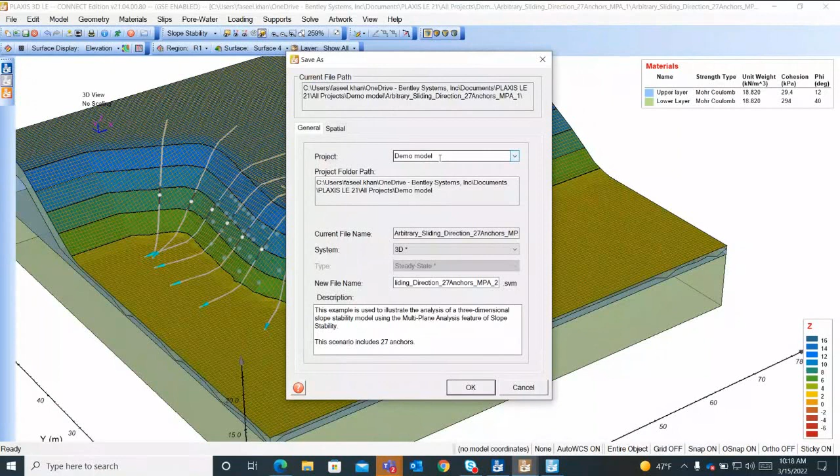Now, if we want to go from this 3D model to a 2D model, what we can do here is we can go to File, Save As, and instead of 3D, I'm going to say 2D from a vertical slice. So I'm going to give it a name, 2D model of this.

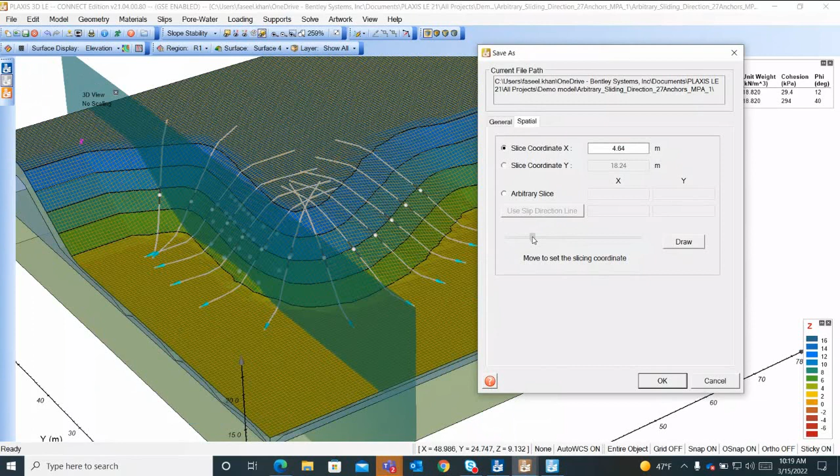And then in the spatial tab here, I can make this section in X or in the Y. We can see visually how it's generated, and then we can move it with this slider as well, or we can give it the exact coordinate over here. So let's say I am here and I want to create a section right over here. I can press OK. And we get our 2D section from that 3D model.

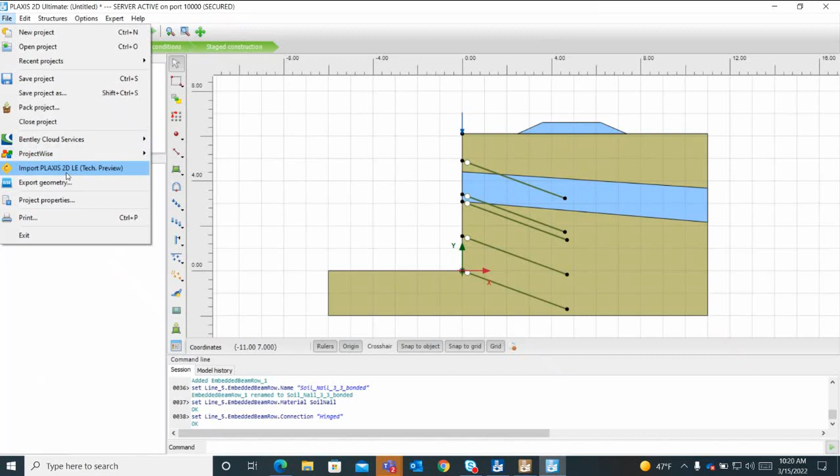And then we can analyze this separately, or we can modify it, add some more supports or whatever we want. And then the same way that we did previously, we can save this model and then go back in PLAXIS 2D like we did before, and we can import that model for a stress analysis again as well. So I hope this was informative in terms of giving an overview of the overall workflow of PLAXIS 2D.